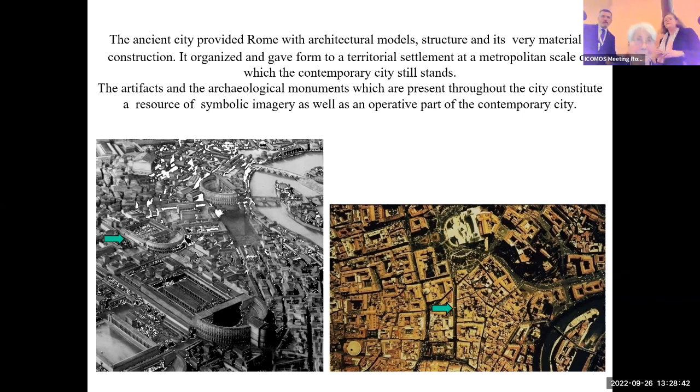Qual è questa? Vabbè, la Crypta Balbi, è così. Rimaniamo all'antica. Ora, se dai un colpo così, sembra che passa, ma... Dove l'hai dato il colpo? No, adesso funziona, era bloccato.

So the medieval place of the Crypta is a medieval word to represent the building along the road through the ancient Campo Marzio and the center of Rome.

In Renaissance times, the road leading to the Capitol was called Via delle Botteghe Oscure because of the characteristics of the place. Only in 1956, the emerging circular shape of the ancient monument was recognized as a fragment of the Forma Urbis, the marble map of Rome carved in the time of Septimius Severus as part of the Teatro Balbi, and since then it was called Crypta Balbi.

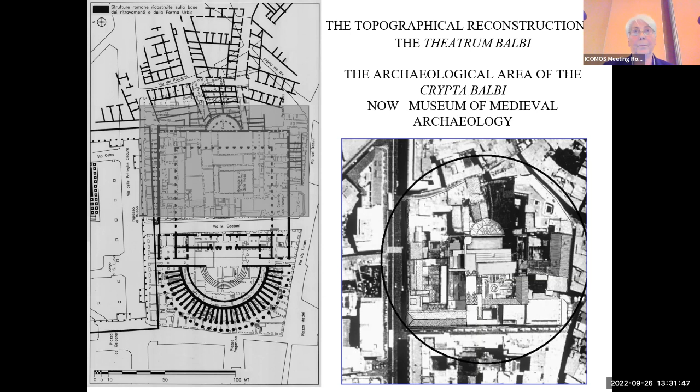On the right, you see the proposal of the work we have been doing over 40 years, 30 years, from the 80s of the last century up to the present time.

In the ancient Campo Marzio, the archaeological area of the Crypta Balbi is an integral part of the Central Archaeological Park that even today forms the structure of many public spaces in Rome.

The new archaeological museum of the Crypta Balbi can accommodate the historic layers and buildings, both ancient and post-ancient, as an information and research center relating to conservation of the historical city, and many students, architects and archaeologists have been working there during the time we have been working.

The passionate work of conservation of the complexity of the site can then transform historical and archaeological lineage into a living architectural archive of the contemporary city, through knowledge of the morphology of the place, understanding of the historical process of construction, and careful consideration of research and findings.

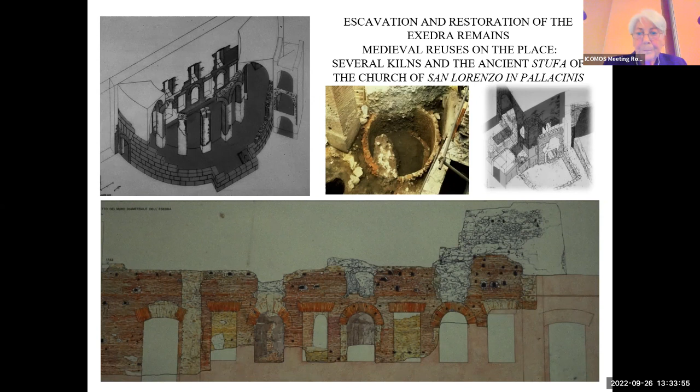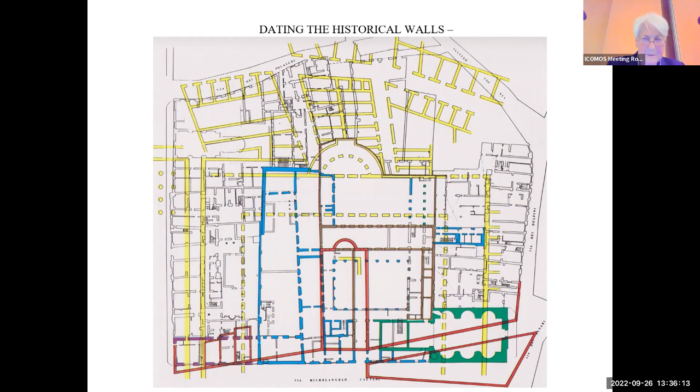We use also to represent the place with models and not only drawings. So we are making now drawings taken from the first plan I showed you, and the model of the ancient portico in front of the crypta, belonging to the temple Neptuni.

The columns you see are not of the crypta. The wall of the crypta is presented here; this is the edge of the crypta, and part of it is under the road delle Botteghe Oscure.

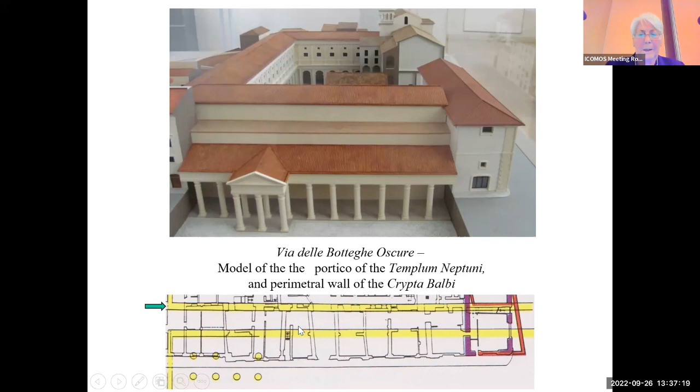Not all the place belongs to the state. All the work we have been doing was under the responsibility of the Italian state and financed by the Italian state. But not all the buildings belong to the state — the first building is a private building and was respected and never demolished.

The widening of the road Via delle Botteghe Oscure brought up some new archaeological monuments: the Temple Neptuni that I showed in the model, Piazza Argentina, where the ancient temples of Rome were made before that, and Crypta Balbi, the theater under Palazzo Caetani.

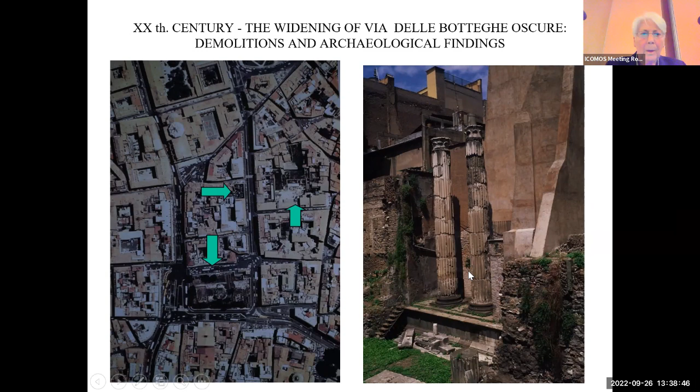The column of the temple. Some studies on the edge of the crypta, how it has been reused in the Middle Ages, and how it is now — the yellow is what was present, in white what is now.

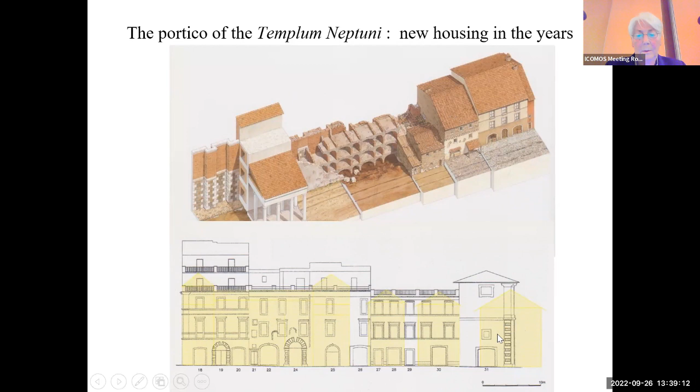A section along Via delle Botteghe Oscure with all the houses built on the porch, and you see the underground level and the first level. The plan of Rome now is at this level, and the level underground.

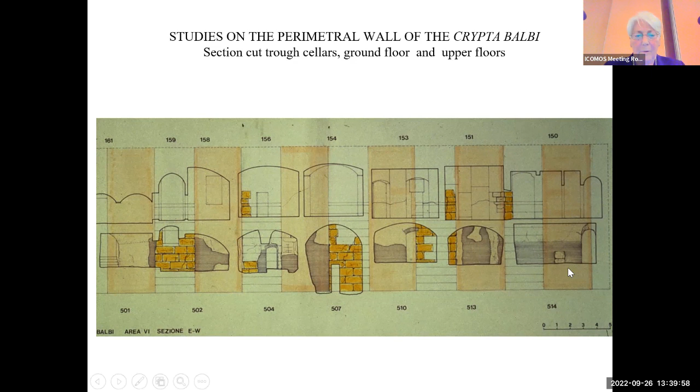Some examples of how the medieval houses were built and renewed in Renaissance times. In yellow is the wall of the crypta — the crypta is here, the porch is here. A model and a reconstruction of what was inside a single house: the underground, the level of the street, the first floor, the second floor. This is underground.

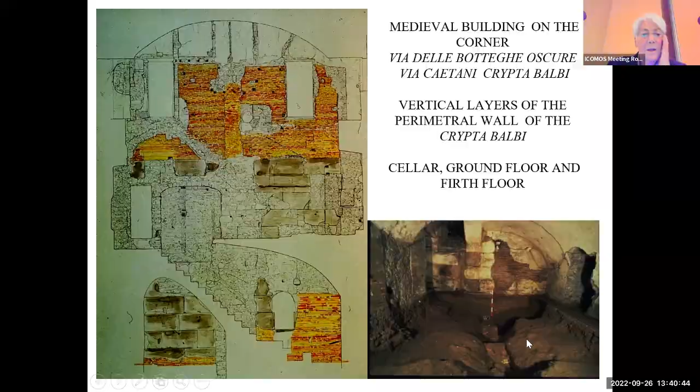A representation of Via Caetani, this is Via delle Botteghe Oscure, Via Caetani, with the last solution before demolishing, with the church of Guidetti and what was left of the convent of Santa Caterina dei Funari, and the little medieval house included in the extension of the convent.

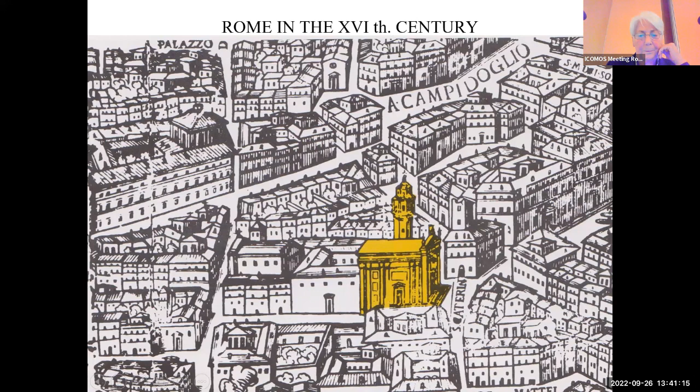And this is a model of the situation: the chapel, first chapel of the place, and then the convent of Santa Caterina.

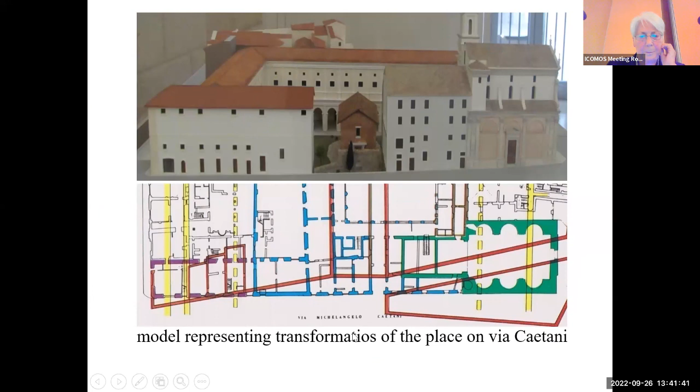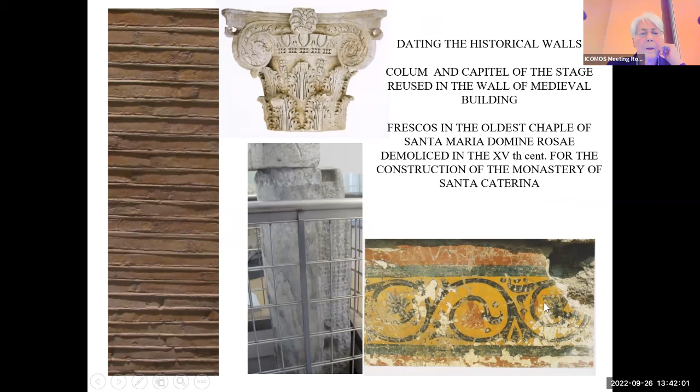In back is the porch belonging to the theater, but it was inside the walls. The columns and the capitals of the stage, and the decoration of the chapel. It was a church built by Guidetti in the 16th century.

Going around the corner, Via dei Delfini was all built in medieval age, but only using the same material, demolishing the porch of the Balbi theater, which is here, and including and renewing the houses. All the porch was open here until the sack of Rome by Emperor Charles the Fifth in 1527, and then it became a more closed place.

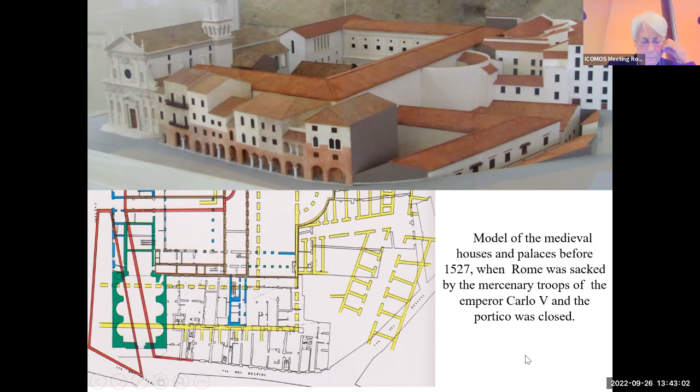Here is the place as it is today. Some examples of how walls were built using the Roman wall, new layers and different layers.

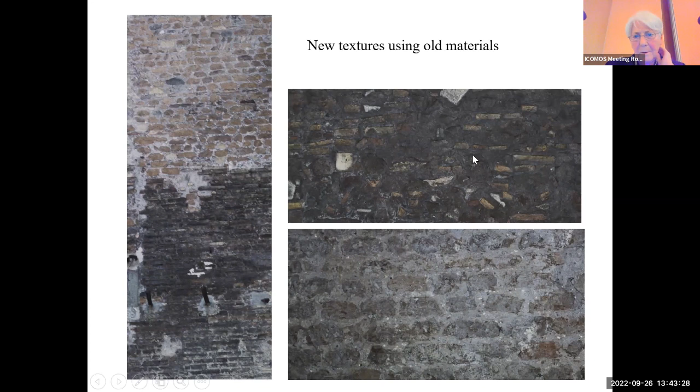The block was in the 19th century, just after the last representation of the situation, with open space inside and the possibility to go through the buildings and through alleys.

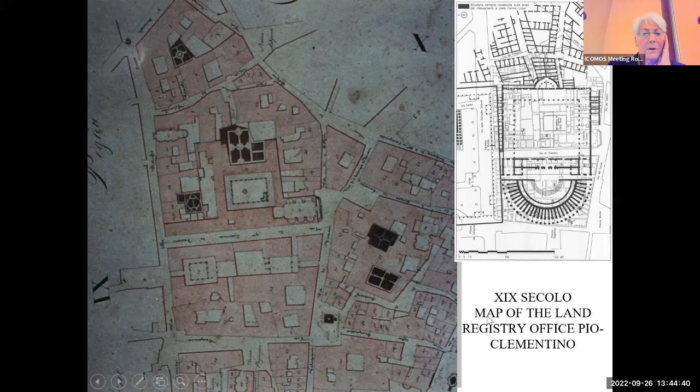This is the last documentation before Rome became the capital of Italy, and it renewed the place, renewed the archaeological area in the back of the Capitol. Here's the Via delle Botteghe Oscure, where we go back now with the construction of the big monument. This is Piazza Venezia, Via delle Botteghe Oscure, and the Crypta is here.

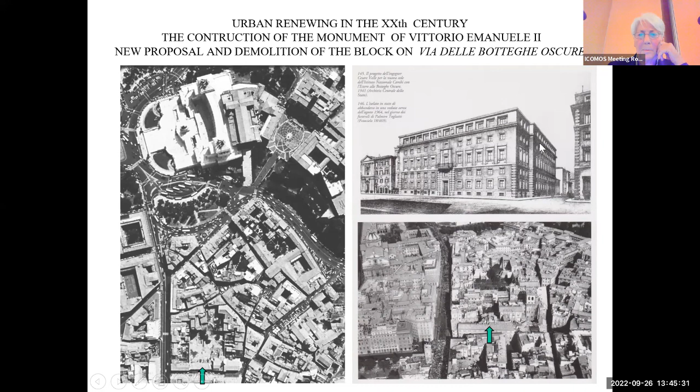The place was demolished in the 40s, and the project to replace this—this was private property, and this was the public property. This was the situation when we started working here.

Excavation gave up some news, and the transformation of the chapel in the ruins of the rest of the convent.

The complex reciprocal influence between the analytical phase of the archaeological research and the synthesis of the project have been represented not only by drawings, but also by models and written text about the reasons of the decision and the description of the executive process, which can also be used for future works and maintenance.

The ancient and post-ancient structures were restored using homogeneous materials with a less invasive intervention. The partially damaged buildings have been integrated with flexible methods, using modern materials in order to guarantee static connection or to place modern functions inadequate to historical structure. Modern and traditional material have been thus composed in the metamorphosis of new forms.

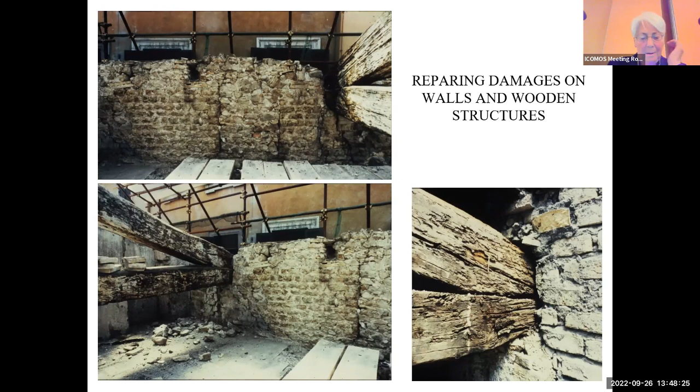Repair damaged walls and structures. You see the situation. Some of the buildings were not even able to stand, and repairing with the same materials.

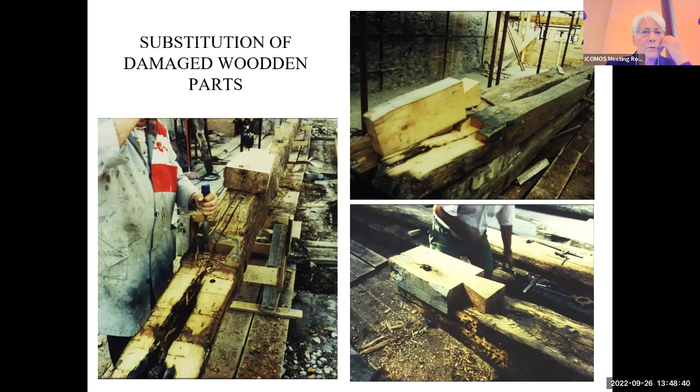Substitution of damaged wooden parts with new parts, working with a skilled person. The new part was dedicated to a museum.

This is the first part where we start working. The entrance on Via Botteghe Oscure and some passages to be able to let people go to upper places, where only the staircase had been demolished, were under demolition. This part was completely demolished.

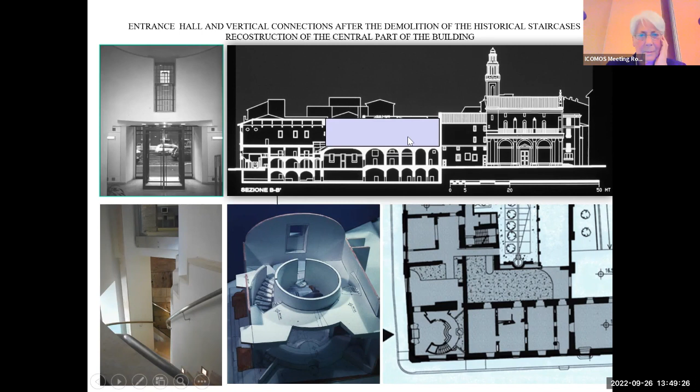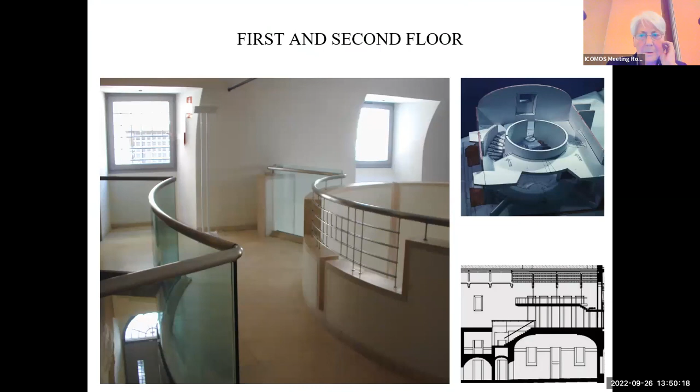Of course, the entrance hall and the passages in front of Via Botteghe Oscure. The first floor, the second floor—we are here now, and this part was...

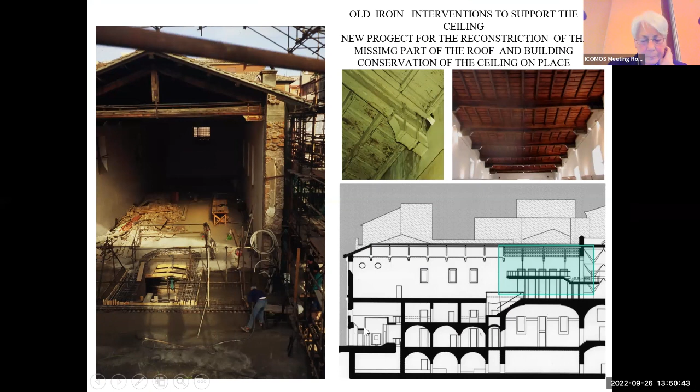the roof was still in place, and it was restored without moving. But this part was completely reconstructed—the new roof and the reconstruction, and the way to the upper side.

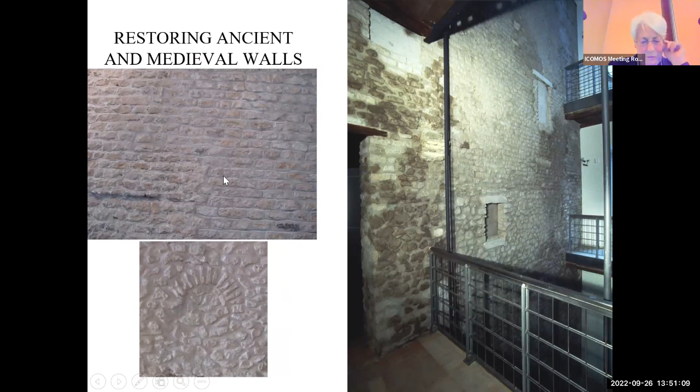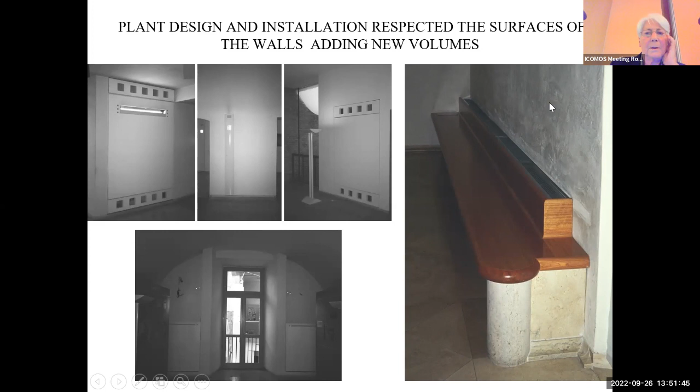Where the walls were in good condition, they had been restored with the same original technology—the medieval walls. And the new services were built with double walls, or using new furniture, in order not to damage the old walls.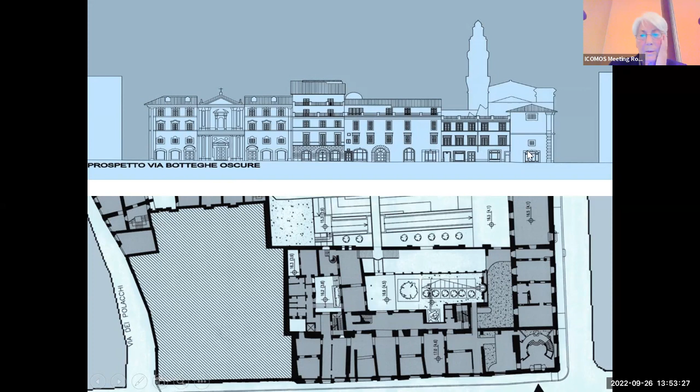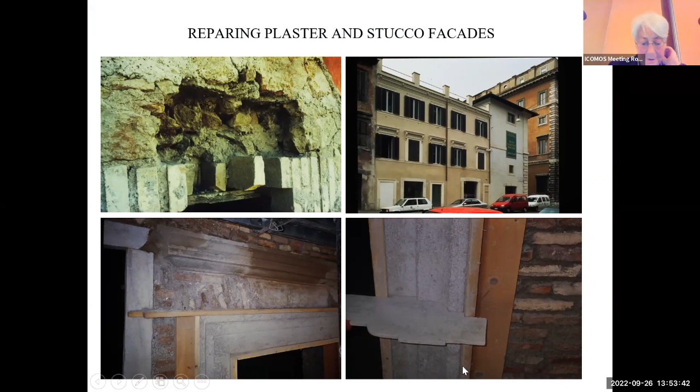And here is the work on the facade, restoring, as I said, repairing what was possible to repair, reusing the same techniques with stucco finishing.

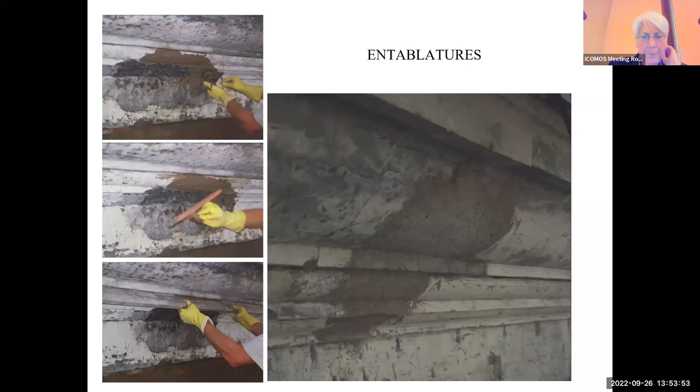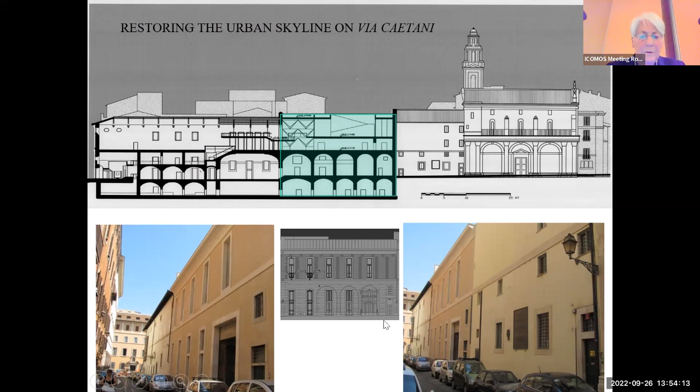And the same problem was used in Via Caetani, where this part was missing, and the facade and the block were rebuilt, as you can see. But on back, the situation is this one.

It was before we rebuilt the front block and this part, which was preserved, but the porch was all gone. And in the project it was decided to repeat the same form and to rebuild this part of the porch.

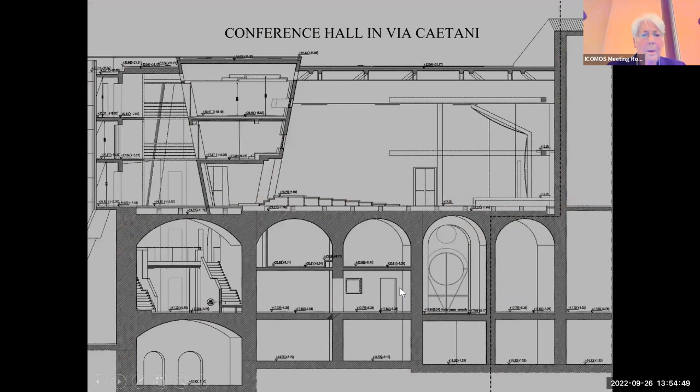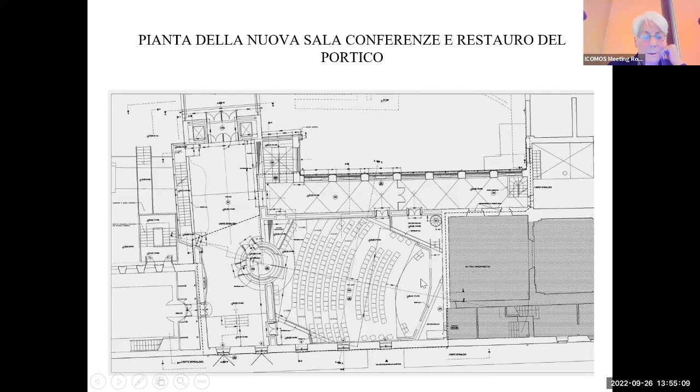Inside, this place, which is completely new, was dedicated to new conference halls for the museum use. But this part has been built right now, and this was a project. Let's see what happens, because I haven't seen anything done in 15 years.

The model, the plan of Nolli.

This is a representation of Rome in the 18th century by Nolli, which represents a way to use how the ancient city used the place, with open spaces which were possible to visit across the block.

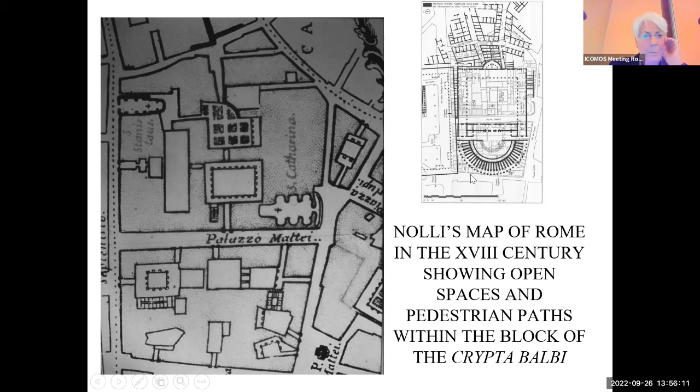This was an idea to repeat in the project the same scheme, and the project respects this way, and so we reopened in the project, because this part has been touched right now, and to have the possibility to approach the archaeological site, which is mostly underground and under houses.

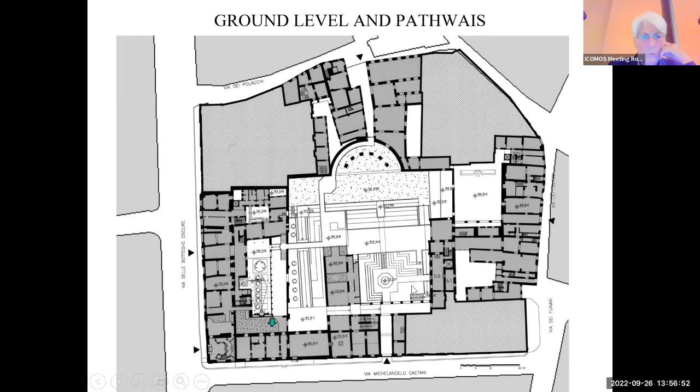Rebuilding the top of the houses, which don't have any roof anymore, with a continuous working place. The large open space of the ancient portico will go back to its ancient function at the center of the architectural complex.

It will be open toward the city through the path of medieval alleys and gardens, as in the plan of Giovanbattista Nolli in 1748.

From street level, the internal space will be articulated down below towards the archaeological area, or upstairs toward the terraces that conclude the volumes left unconcluded by the demolitions, dynamically composing ancient and modern architecture, from continuously varying points of view.

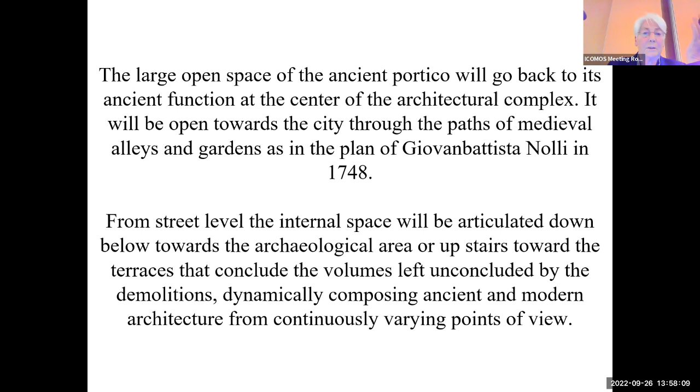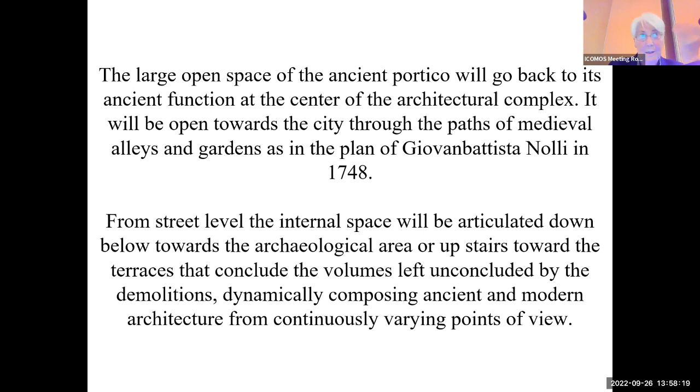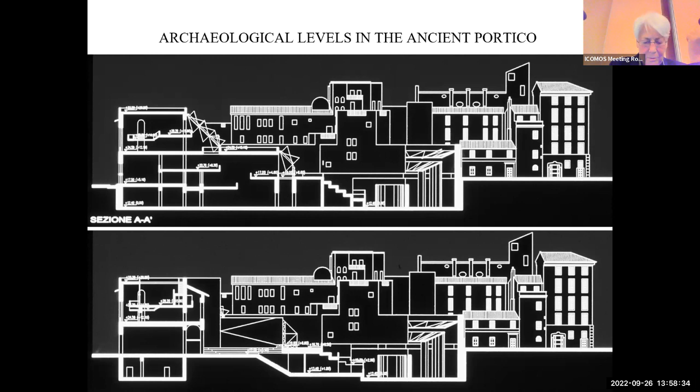This is the part of the project which should have a continuity of work, and the conclusion of the place recalls the image of Sangallo. Thank you.

Oh, I cannot see, but really masterful. What you have to go and see if you haven't, because when I can, I take my students there, as I think it's the best lecture you can do, just take them around. We were with her, so it was completely luxurious. And I will say the word complexity, what a plan, what a building. And then you find this ruin, this leftover thing, and you make it architecture. I always tell the students, look, at the end there has to be a good piece of architecture, that's why we are keeping it. But in her case, I think you make it a better place, and that's what good intervention does.

Well, many people have been working on this place, and most...